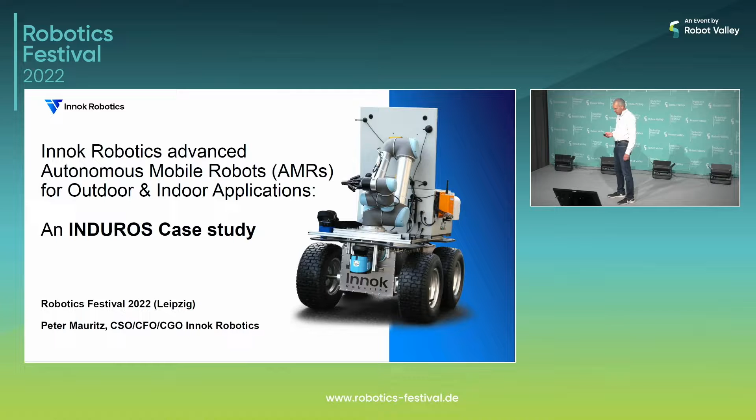Our mission is, we are a player in the field of autonomous mobile robots. We want, as many AMR producers want, to add some value-added activities, to help our customers replace stressful, hard, dangerous, time-consuming activities by machine work. Our specific angle and advantage is that our AMRs have indoor and outdoor capabilities. There are quite a few AMR producers and developers for indoor on the market, but I hope we'll show you that outdoor is 98% of the world, and therefore that also needs to be addressed.

Innok at a glance: we are on the market since 2012. So we are not a startup, but right now in a very exciting phase, which is a scale-up phase, if you want. And that has actually been true since June 2022.

Our products are geared towards industrial applications, of course, and then research units, among them top German universities and institutes for artificial intelligence and everything. We have customers across a broad range of industries, and I will show you later on that this is a really powerful technology, AMRs with outdoor capabilities.

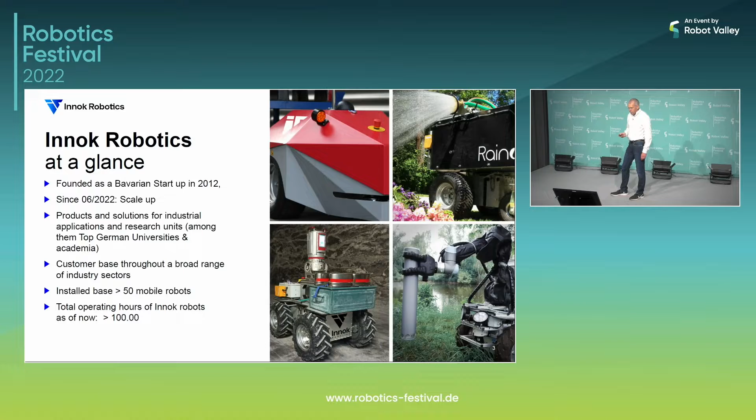Our customers are, among the research institutes, the famous RWTH Aachen. We have a customer like TU Munich, Technical University of Munich, and many others. And that was the starting point for Innok Robotics.

For the first 7 years, we have actually dealt with universities, and of course also business customers like Daimler, Stihl, Nokia, Kali und Salz. So a bit like the who's who in Germany of industrial customers, but these were all geared towards development projects. We were delivering hardware, the robot platform, and they were developing with those robots.

But it turned out that we needed to really produce our own AMRs, our own products, and I will show you later on what our focus right now is.

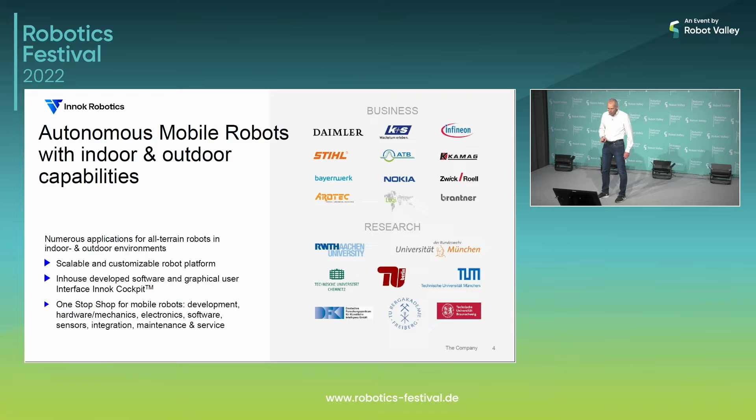So the key proposition of AMR producers is always, why do I need that? We have the cost pressure, of course, regarding labor cost, and the lack of labor, availability of not very experienced labor. Sometimes it's just simple labor we cannot find. We come from Bavaria, Regensburg, and all of southern Germany practically has full employment. You don't get anybody to really work, it's difficult to get somebody, and therefore replacing manual labor by machine labor is, I think, the agenda for now and the next several years, which is our belief.

And then there's a push towards carbon neutrality. All our AMRs are electrically powered and are replacing combustion machinery sometimes and often. And of course, we can be part of smart factory concepts because we automate and autonomize certain processes, which I will show you later on, which are very interesting.

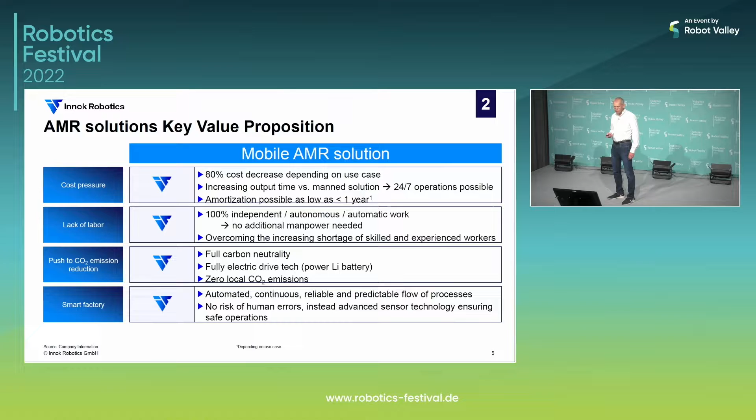The return on investment of our AMRs - they are not cheap, we are not talking about vacuum cleaner robots. Our systems are really in the range of 80, 90, 120,000 euros. But in the end, usually in a manual option, you need a vehicle costing maybe 30 or 40,000, and you have a guy sitting on top of this vehicle, which then costs you maybe 50, 60,000 more. So I guess in a year, usually the return on investment and the amortization should be achieved.

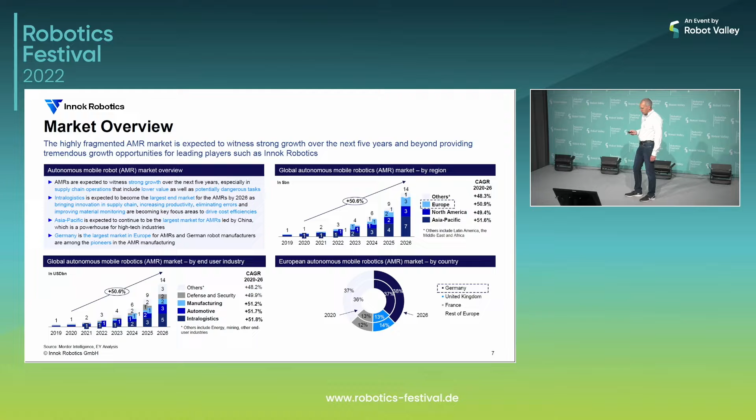Market overview is brilliant, is wonderful. I think you cannot read it because the numbers are probably too small, but alone in the area of supporting materials supply, within the factory, within the buildings, but also warehousing, people are estimating like 50-60% compounded annual growth for the next couple of years. So we're looking at probably 10 billion business alone in intralogistics, transport, autonomous mobile robot business in the next couple of years. That is what people say about the market, and this is true for all aspects of autonomous mobile robot applications.

So now, why should a robot work outside? What is the difference also? As I said, I think 98% of the world is outside, and our vision is that within the next 10 years, maybe in 2032, we will look back at 2022, and we cannot even imagine by that time how many tasks outside have been dealt with by humans. That's a broad range of activities. We think the autonomous mobile robot, indoor and outdoor, will be just a natural companion of the people.

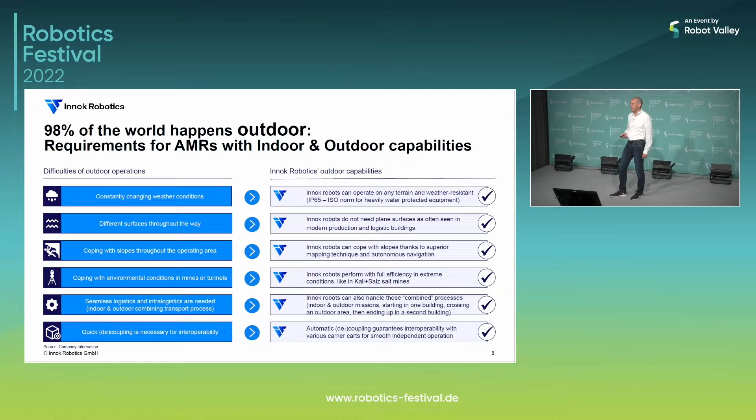So indoor, outdoor, I will come to that a little later. In a nutshell, Innok Robotics, we have a platform, a robot platform, which consists of, on one hand, the hardware, which you see on top, the Innok Heros, which is the mother of all our small devices right now. From there we developed further, and we developed 3 AMR platforms. One is the so-called Induros, the red guy over there. It's the transport robot we also brought with us for intralogistic and repetitive transport processes.

And then we have the irrigation robot, called Rainos. It's able to irrigate a full shift, 8 hours, plants, flowers on cemeteries and other green areas, fully autonomous. And we have the plant inspection and surveillance robot Inspectos.

On the lower part of this slide, you see the Innok cockpit, which is the most important part of our business. In the core, of course, we are a software company. Our autonomy software, Innok has been working on that for 10 years now. We are ROS 2 based, and there are specific containers within this software. One is for predictable drive control. Outside areas, it's rather difficult.

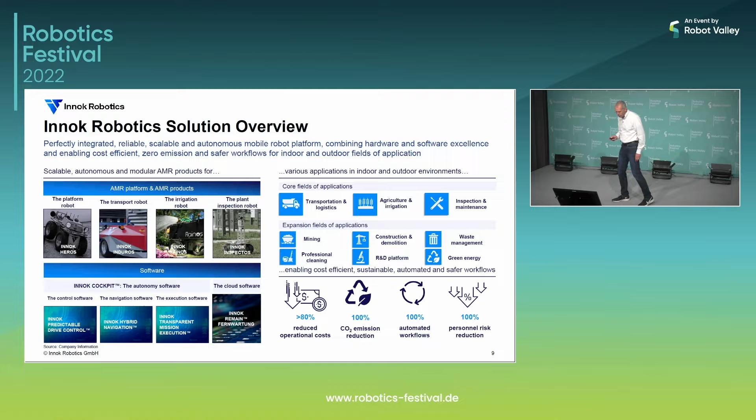I will come to that a little later, there's a software overview we touched upon already. We have now 3 core fields of application we are concentrating on, and I will go into the left-hand side.

So the Induros, which is the intralogistic and transportation robot, that can be done in public spaces or without public access. There are regulatory issues right now, but they will be overcome in the next couple of months and years. I think that will be unavoidable also in Germany, even if we are probably a little behind other countries. But these AMRs are, of course, safe. They have their safety features. We have SICK outdoor 3D scanners on top, so they're super safe compared to a crazy forklift driver.

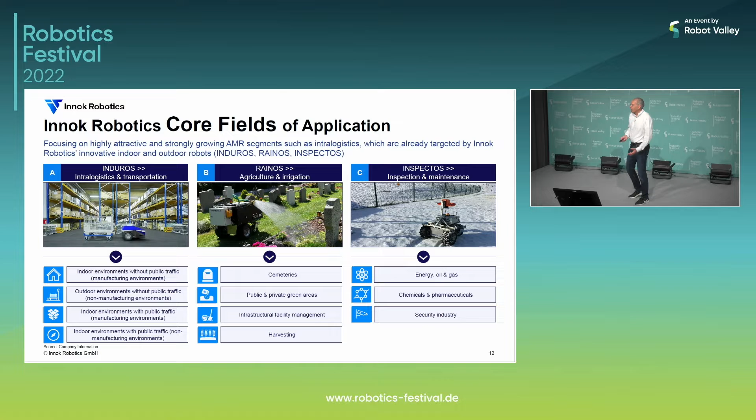We were forced by investors to concentrate ourselves - what are you doing, are you a robot producer for what are you now, are you a Rainos producer or an intralogistic producer? I find these questions rather funny because you need to understand that autonomous mobile robotics is the same thing as robotics itself. A robot is not only a welding robot, it's an enabling technology, so it's a broad range.

And that is also true for all what we call expansion fields of application. We want to be the provider for autonomous mobile robotics with outdoor capability, wherever that is. Where we have customers, where there's an attractive business, we would like to pursue it. And that is why we are now in a fundraising process for up to 8 to 10 million, which is managed by Ernst & Young in Munich. So if anybody here is interested in participating, happy to contact me. We will happily also connect you to EY.

So we have mining, we have customers like Kali und Salz. Why should we wait for them or let them wait 5 years and then pick up this business? Because this is an attractive business, and we are, I think, one of the only ones doing autonomous mobile robotics in a salt mine, which is a harsh environment.

Same thing is true, we're working with Goldbeck, Hilti and others in the field of construction demolition - an untapped field for outdoor robotics, very beautiful, very interesting, very exciting applications.

Waste management, we are working with the largest Austrian waste management company, Saubermacher. This will go live in a couple of weeks, replacing dust bins in public space. And you see that it's also combined - it's a hybrid autonomous mobile robot, because there's also an actuator on it. You see Universal, good partners for us, and that will increase in the future. So you will have a stop by the AMR, and then there's some sort of manipulation on top of it.

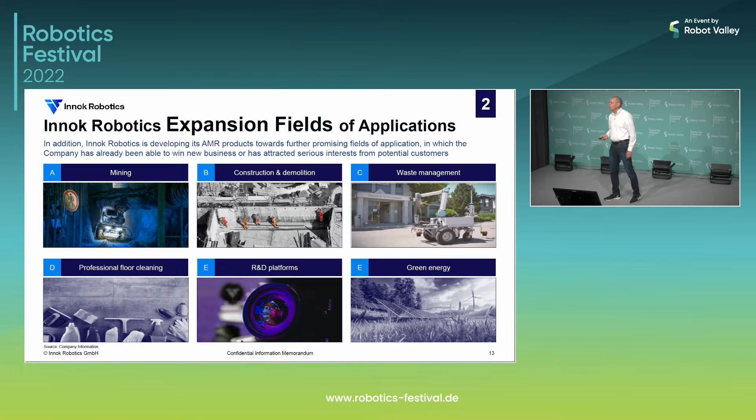Green energy, I don't need to tell you - mowing, cleaning those PV spaces, that is a lot of business that's coming up now due to the current situations. So I will now move into just one...

...application area, which is the transport robot that we brought with us. This system is used by - so we have developed it in 2020.

In 2021, it was in full productive use for the full year. Our pilot customer, Zwickröll in Ulm, is happy to show you around if somebody's interested in a system. And this is a kind of pure outdoor system.

It's connecting different buildings. The customer came to us and said, okay, I have 10 forklifts, and one is only driving around from one building to the next, delivering goods, in a circular, very repetitive process. I want to have just 9 forklifts. The 10th needs to be done autonomously, and can you do it? And we said yes. I will show you in a minute.

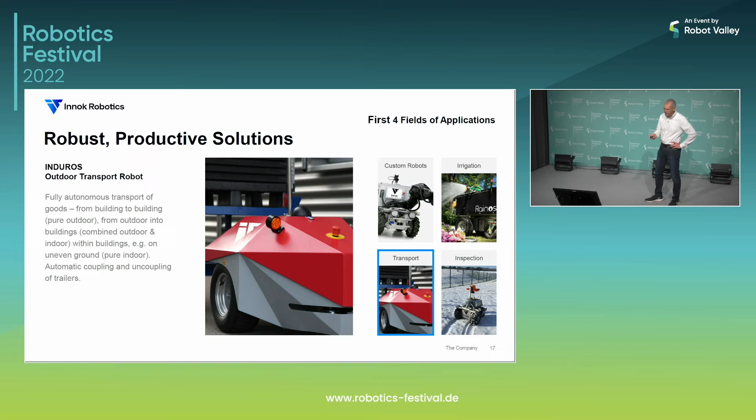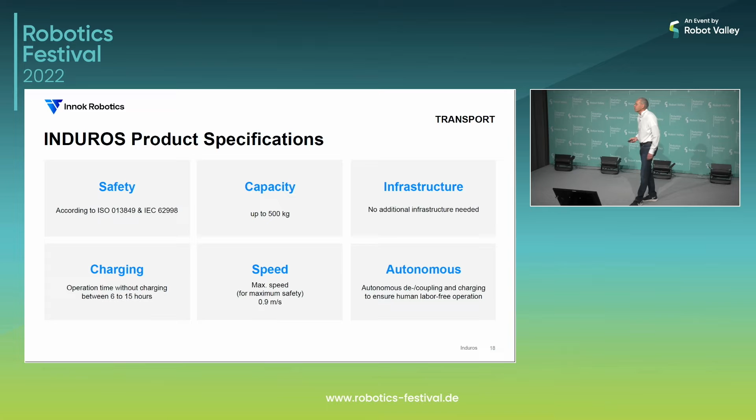So there are some specifications. In this case, the payload can be 500 kilograms. No infrastructure needed, very flexible, as always with AMRs. Charging time is such that it can operate for like 10 hours. And this is Zwickröll in Ulm.

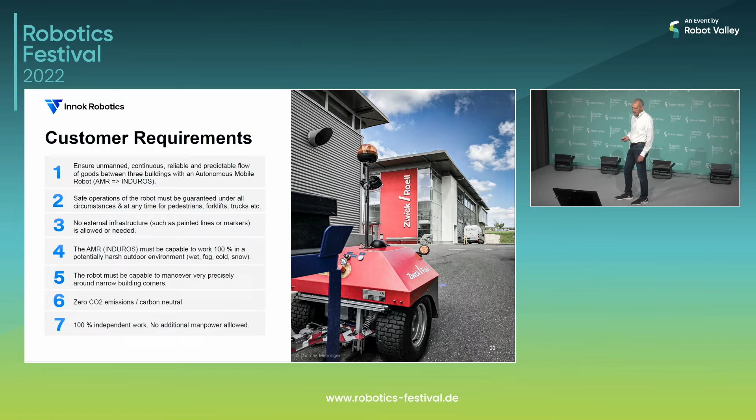As I said, a lot of customer requirements - needs to be safe, needs to be reliable and everything. I think we more or less delivered. We have a system with customized order management, so it's a time-controlled concept. Every 20 minutes, there is like a Schwäbische Eisenbahn - it's Ulm, Biberach, Durlesbach - circling around every 20 minutes.

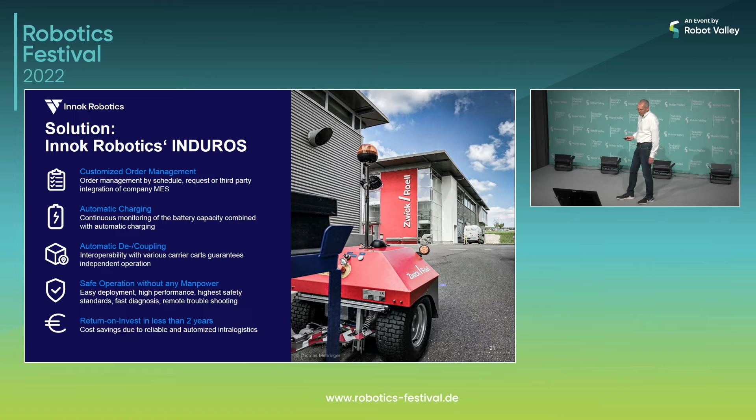There's an exact industrialized transport process, with automatic charging, coupling, decoupling, and everything. And that is important - the charging, the coupling also.

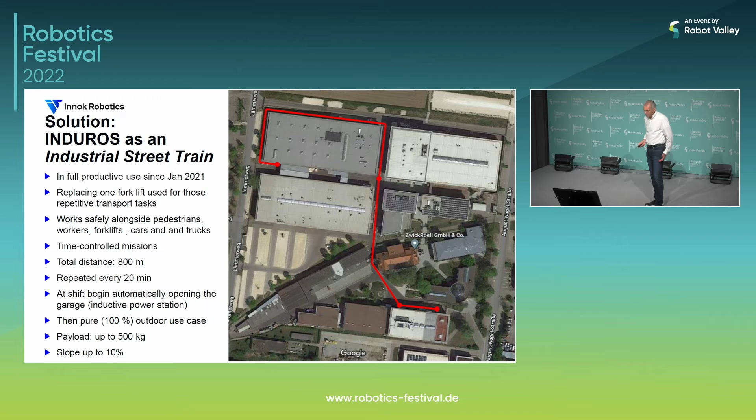You can see here in the morning, the AMR is really leaving the garage, opening the door, and then picking up at the first railway station, taking up after-sales parts, and then taking them to a production hall, and then taking up the worked-on parts and taking them back to the outbound logistic hall. So every 20 minutes, it's only 800 meters, but replacing this one forklift.

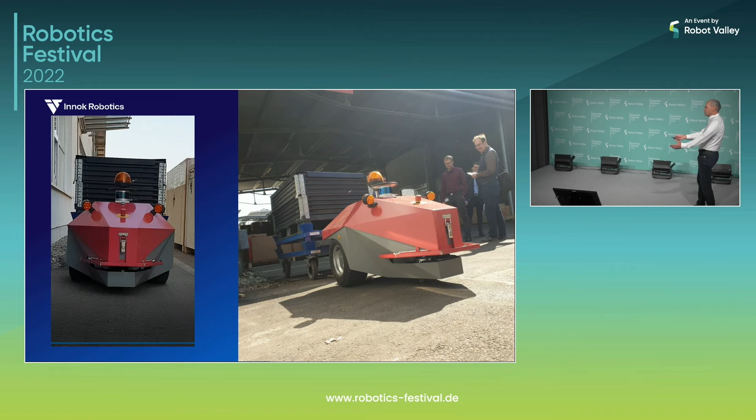In the beginning, people were a little bit afraid - what is this guy doing here? But now it's a very normal part of the outdoor environment on this specific plant. And our customer, ZwickRoell, is happy also to show any interested customer around. And they're very, in the meantime, proud of this system, because to our knowledge it's the only system really that is doing such a job.

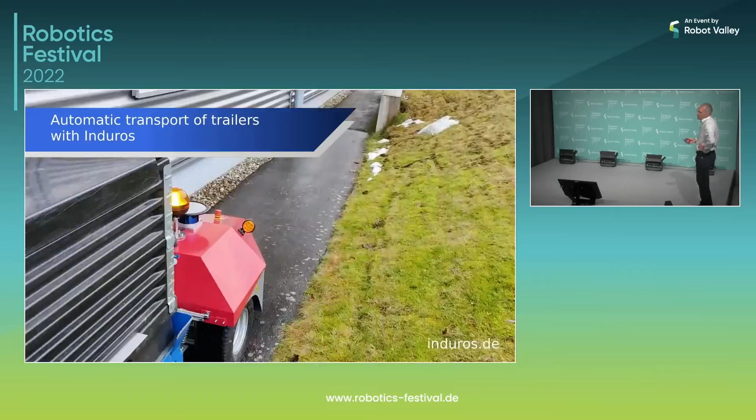If we have a chance, there is a video - maybe our friends from the technical area can show that. So that is real life. We are taking a terrestrial 3D scan with the Riegl scanner, and this is the background for our operation.

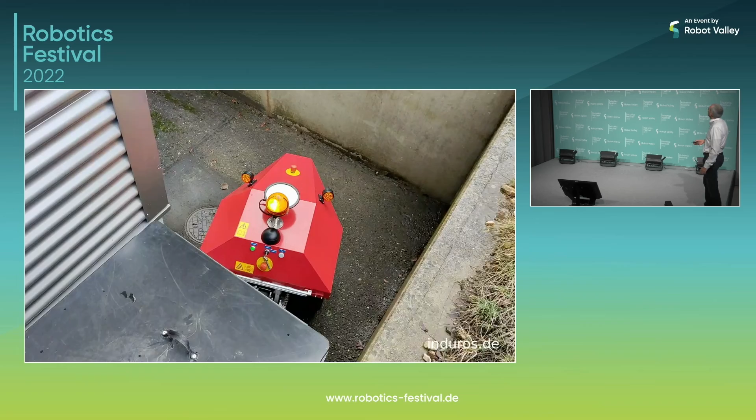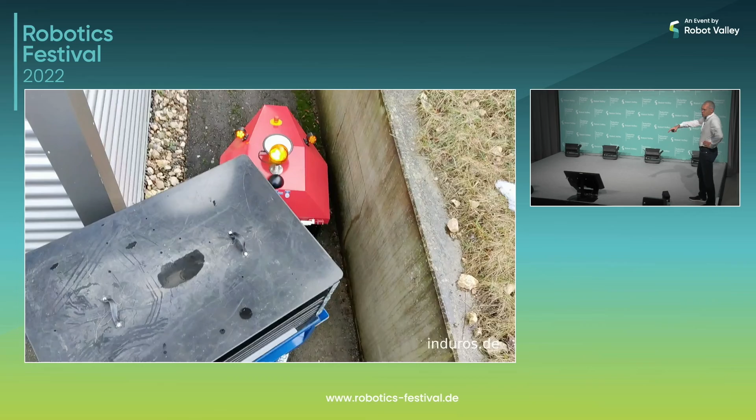And then it can take really tight and really precise routes. The customer wanted us to circle around the building because he was a bit afraid that this small guy would be pushed away by big trucks on the main loading station. So we can do that with 2D and 3D LiDAR - that's no problem.

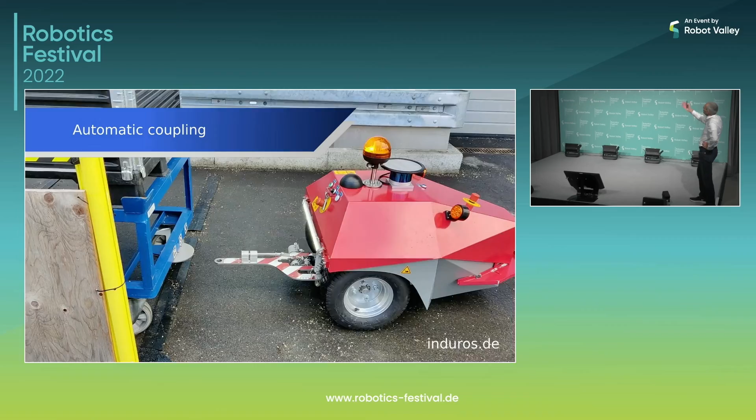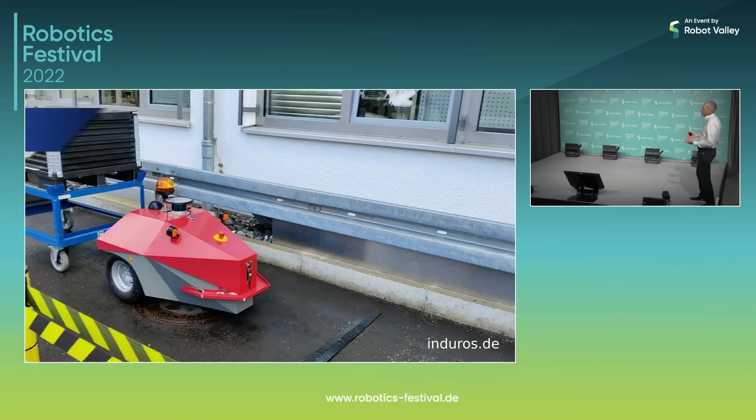An important part is the automatic coupling and decoupling. This is one of the stations. The AMR will get a full carrier, taking it to the production area, and then the worker comes out - the blue collar guy comes out - takes the parts, and he exactly knows in 20 minutes it's here. So he doesn't need to wait for a forklift driver who's smoking a cigarette, whatever.

It's an industrialized process. Now, well, you can imagine it's coupling, it's decoupling - something's wrong with the video here. But in the end, it's connecting all those buildings, and it's doing a perfect autonomized job, taking the headache off ZwickRoell and many other customers.

So we presented it at the Automatica and the Logimat, and we can say that we had wonderful reactions, and have really a big sales pipeline right now, because this is something which is really new.